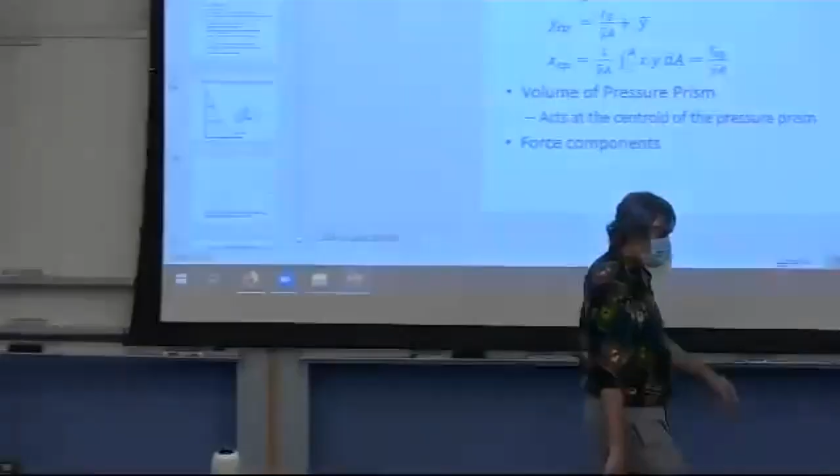Before we start today, announcements. There should have been posted the class invitation for the face-to-face lecture, I believe last week, that will carry us through November 20th.

There is an exam this Friday, covering material up through and including what we finished last week. So that's everything from fluid properties to forces on submerged surfaces. The exam rooms and who is in each room was posted today, just before class.

If anybody has an issue with the exam specifics, meaning date, time, room, they should have contacted me last Friday or earlier. But if not, you need to contact me after class if, for example, you can't make it. We need to try to arrange something.

Are there any questions from when we last met? Yes, the exam's still at 2, right? The exam is at 2 to 4 p.m. and it's face-to-face in one of the working rooms, I believe.

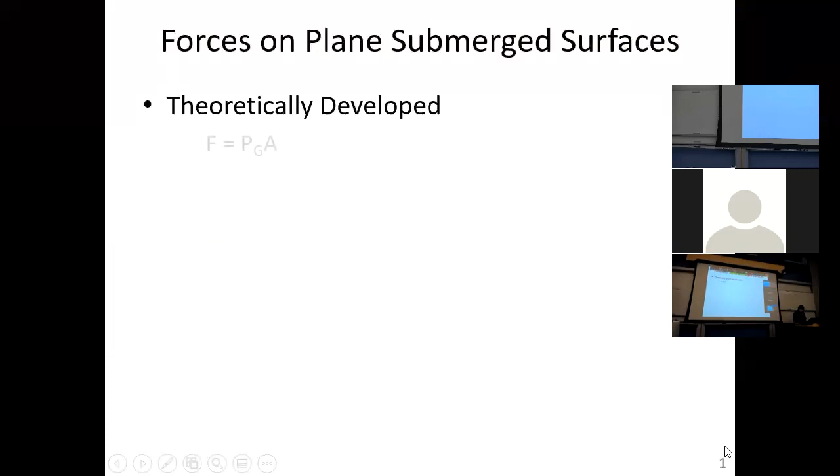So, with that magnitude, since the force is a vector, we need to know where it acts. For a plane surface, what we really need is an x, y coordinate. The y coordinate is, of course, along an inclined axis, and the y distance from the free surface to the center of area, to the center of pressure, is the location along that y-axis from the free surface to where the force will act.

What we found is, again, if we have some inclined surface, the y-axis increases from a free surface, and we made the derivation from a free surface. That's why it's important to know where it is. Earlier, I had done an example where we had an enclosed container which did not have a free surface, but we could then calculate where the free surface should be.

Do you have to know where the free surface is to get the magnitude of the force? No. All you need to know is the pressure at the center of area, and you know the pressure varies linearly across the surface. But for the location of that force, that's where you need to know where the free surface is.

So what we developed was, if G is the center of area, we were calling CP the center of pressure, measuring that from the free surface, YCP. That's equal to the moment of inertia about the centroid of the area, IG, divided by the distance from the free surface down to the center of area, y bar times A, plus y bar.

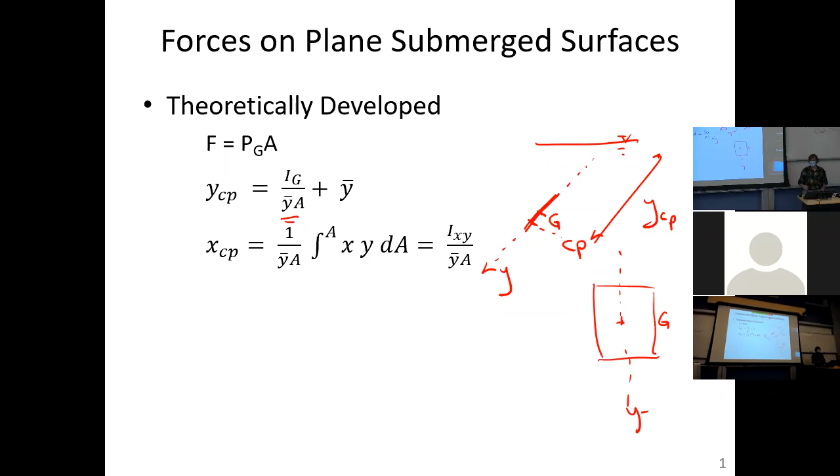Without any axis of symmetry, the other way to look at the force is that the force is equal to what I termed for you the volume of the pressure prism. So when you take this term, pressure at the center of area times area, basically what you're doing is calculating the volume of the pressure distribution, or what we call the pressure prism over the surface.

Is that an easier way to calculate than PGA? I don't think so, but again, it's another way of thinking about it, and you'll get the same answer.

And again, the resultant force acts at YCP, XCP. If you're looking at it as the pressure prism, that resultant force acts through the centroid of the pressure prism, just like weight - when we look at it in the vertical direction, the weight for any object acts through the center of mass. So it's a similar type of concept.

And then the last thing we talked about was how we could take this resultant force F. So for example, this resultant force F, we could break it into horizontal Fx and vertical components.

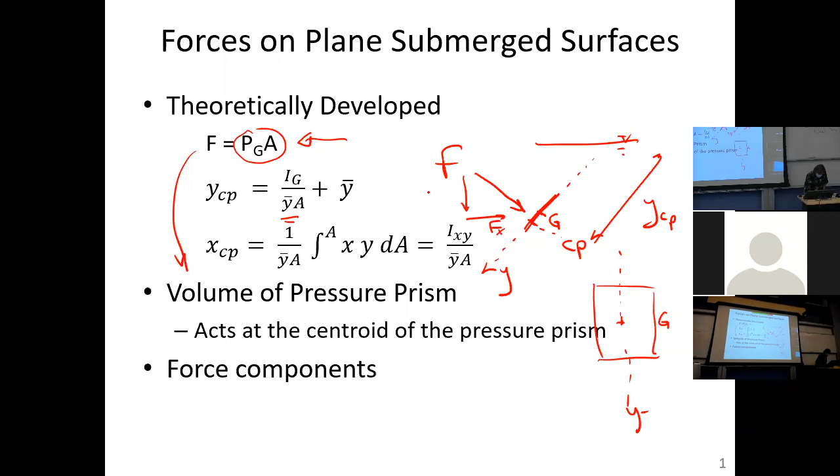And when we looked at it as far as components, on the next slide, the resultant force, if you're breaking it into components, is the vector sum of the horizontal and vertical force. The line of action would be found by a moment equilibrium.

Is that easier than calculating YCP and XCP? I don't think so, but if you think it's easier, you can certainly do it that way. You should get the same answer.

For those two components, the horizontal component, what you have to do is take that inclined surface and project it into a vertical plane. It's like taking a flashlight and flashing it on the object and looking at the shadow on the vertical wall. And that's now what you use for the inclined surface, quote unquote.

That inclination, since it's on a vertical wall, is 90 degrees. And that gives you the horizontal component of that force.

So again, under this horizontal component of the force Fx, you project the surface into a vertical plane, compute the projected surface height. The width should be the same as the natural surface that's not projected. Compute and then employ the theoretically developed equations on the projected area.

So what I mean by that, we had F is equal to PGA on the last slide, which is the generic form for any inclined surface.

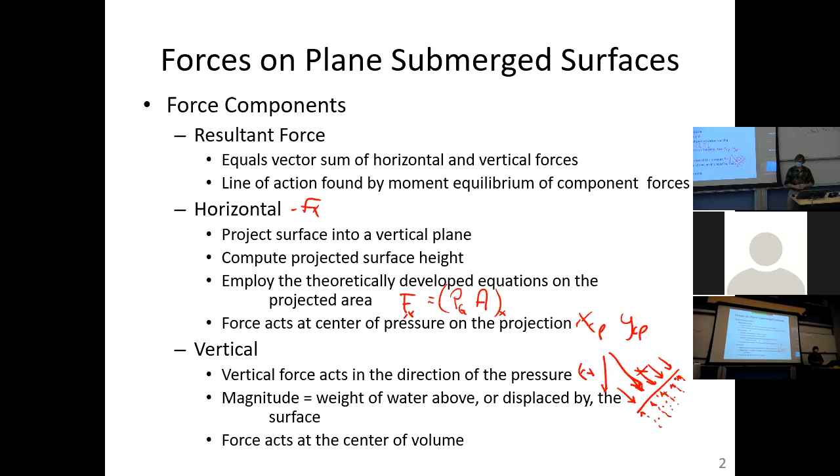So when we're looking at the vertical component, we are talking about the magnitude of the vertical component being either the weight of the water that's physically above the surface, but if the fluid's below it, it's the weight of the water displaced that would have been above the surface. And that force acts at the center of the volume.

So we did an example with that, and that's where we left our last class. So what I want to talk about today is we're going to use the same concept we just talked about, only now extend it to curved surfaces.

For example, you've seen tanker trucks with fluids moving down the highways, and the ends of those tanker trucks are curved, and very commonly the sides are curved surfaces too. So in order to specify the welds or bolts or whatever fasteners to hold that thing together, we need to know the forces occurring on that system.

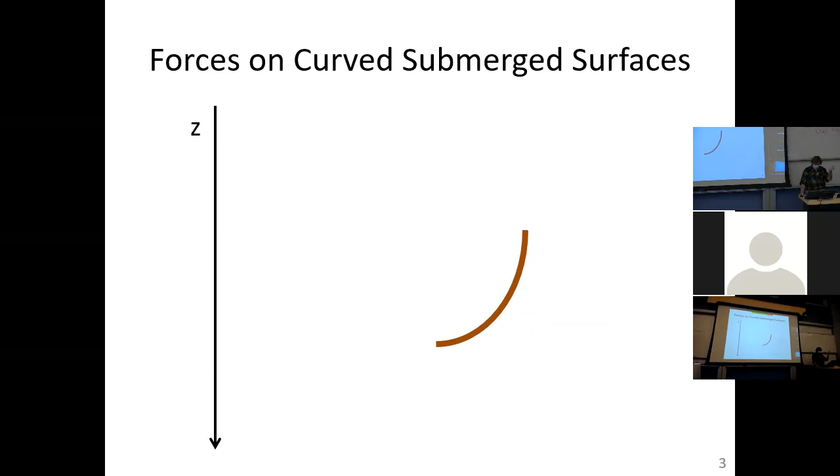So here we have a curved surface. And if we look at the vertical direction, Z was downwards, H was positive downwards, or we'll just say this is the Z direction. We know that pressure increases linearly as we go down through a fluid. So we have this curved surface now, submerged somewhere in this fluid.

We're either looking at the left side of the surface or the right side of the surface. We're always looking at these types of problems as the fluid being on one side of the surface. On the other side, there could either be no fluid, so atmospheric pressure, or it could be a completely different fluid. But the mechanics are the same — we're only calculating a force on one side.

So in the vertical, you can see that we have these pressures operating all over the surface. But again, we look at the pressure distribution as being normal to the surface. So what you have is this curved pressure distribution everywhere normal to the surface. And when we integrate that pressure distribution, we're going to get some resultant force.

Instead of going through a theoretical development like we did before for a plane submerged surface — well, we could go through a theoretical development, but you would need to know the equation of that line. So if it was a parabola or a semicircle, you could build that into the integration. But conventionally, what we do is take the components.

Likewise, for the vertical force component, again, the fluid is either above or below the surface, but the vertical force component is just going to be the weight of the fluid that is physically above the surface or displaced by the surface. So if we look at a semi-theoretical development, if we look at dA, dA is so small that it's basically a little plane surface.

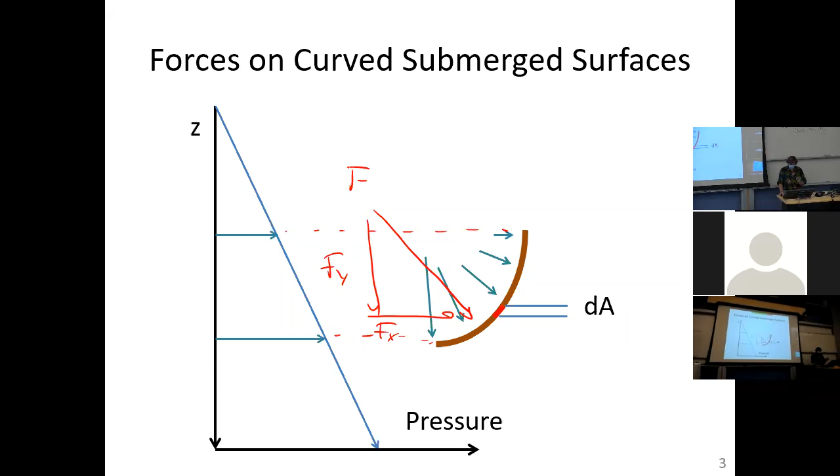So here's our dA — it's incrementally small. And on each little incremental surface dA, we have an incremental dFx and dFv. All we're saying is at the differential scale, we can certainly take this surface, break it up into components that are basically plane submerged objects, and use everything we talked about before.

Ultimately, when we integrate over the entire surface, all we're doing is integrating or summing the horizontal forces on this curved surface, or the vertical forces. So as I stated before, the horizontal force is the force acting on the projection into the vertical plane, and the vertical force is just the weight of the fluid above or displaced by the surface.

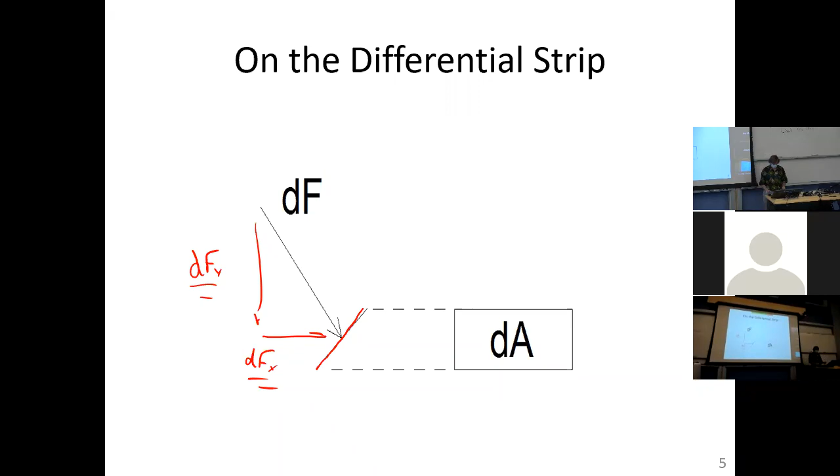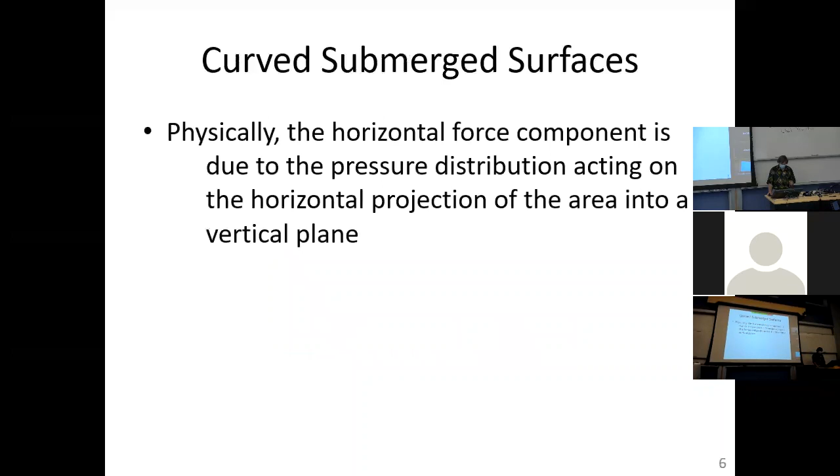So I'm going to do an example. I just wanted to kind of get into this. I think I've talked about all this.

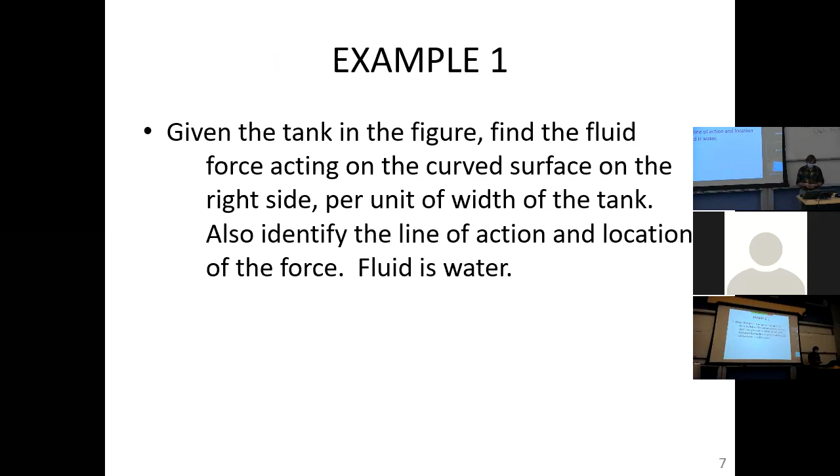Here's a tank, and you'll see it on the next figure. What we want to do is calculate the force on the end of the tank, which is going to be a curved surface. The fluid is water, and we also want to identify the line of action and location of this force.

So this is what our tank looks like, and that red area is a portion of the tank where we want to calculate the force. What's the force on the end of this tank? The end of the tank is a quarter circle with a radius of 6 feet, as you can see. You can also see in this problem that we have a submergence of this curved surface.

So we see a free surface. Remember, the fluid in here is water. Since all these dimensions are in feet, we're going to work the problem in the foot-pound-second system of units. Again, when you're doing the exam or homeworks, take the cue from the way the problem is given to you. If the problem's given to you in metric, do the problem in metric. If it's given to you in BGS, do the problem in BGS.

So if we know that we have 3 feet of submergence to the very top of this, if we take this curved surface and project it onto a wall, it's going to appear as a vertical plane.

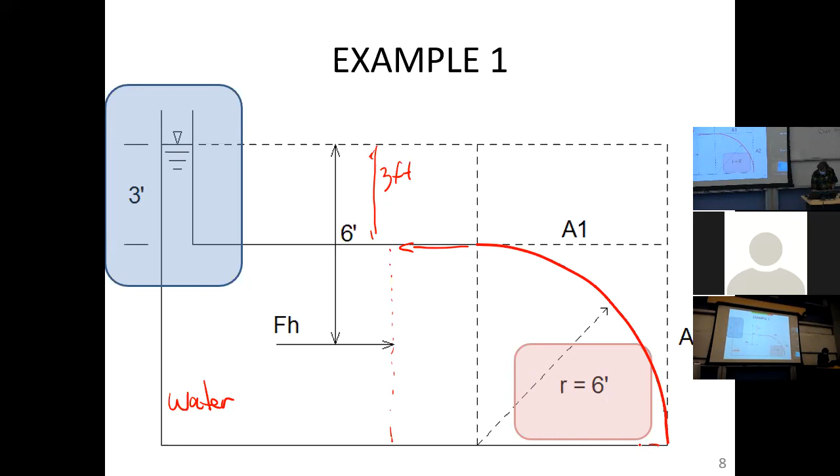Now, I haven't given you the width of this tank. Let's just say it's 1 foot wide. We're doing this problem per unit of width. So if it's 1 foot wide, when you project this curved surface into a vertical plane, what you get is a surface that's 6 feet high by 1 foot wide. It's a rectangle. That's the projection of the curved surface.

And I think for the rectangle, we all know that the center of area is halfway down from the top. So if it's 6 feet high, it's 3 feet down from the top. And if it's 1 foot wide, it's half a foot over from each side.

And since we know where the center of area is, if it's 6 feet high, from the top of the tank to the center of area is half of that 6 feet, or 3 feet. And since you have 3 feet of submergence, the depth of submergence to the center of area is the 3 feet plus the 3 feet, or 6 feet.

Once we know the depth of submergence to the center of area, we can calculate the pressure at the center of area. With the pressure at the center of area of the projection, we can get the force on this horizontal projection, and that's the horizontal force.

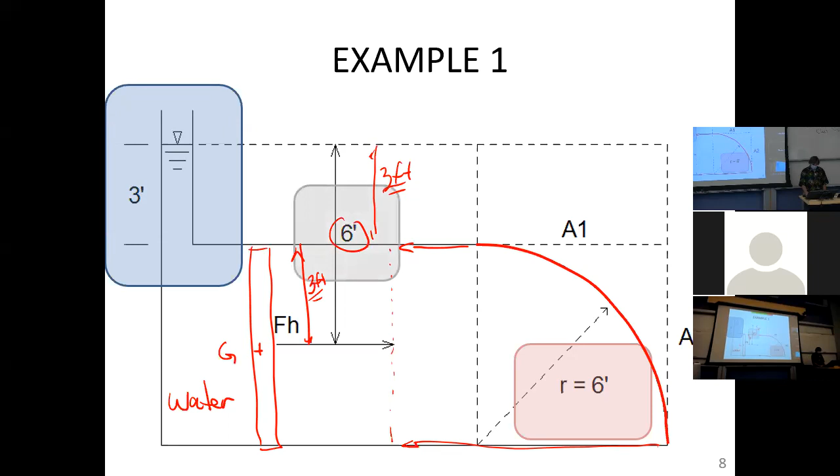Continuing: the horizontal force is going to be the pressure at the center of area of the projected surface into the vertical, that's the 6 foot by 1 foot rectangle, times the area of that 6 foot by 1 foot rectangle. So it's the pressure times the area of the horizontal projection.

So there's our curved surface, and as I drew on the last one, we're going to project it into a vertical plane. Looking from the edge, before all we saw was a quadrant of a circle. When we project it, it just looks like a vertical line, but if we look at it from the side, we will see this rectangle that's 6 feet high by 1 foot wide. Knowing where the center of area is, we're calculating the horizontal force on that projection.

So the pressure at the center of area is the depth of submergence of the center of area, which we identified in the last slide to be 6 feet, times the specific weight of water. So gamma H is the pressure at the center of area. And then we multiply it by the area, 6 feet high by 1 foot in depth. Again, it's a force per unit width, if you will. And that gives us 2,246 pounds.

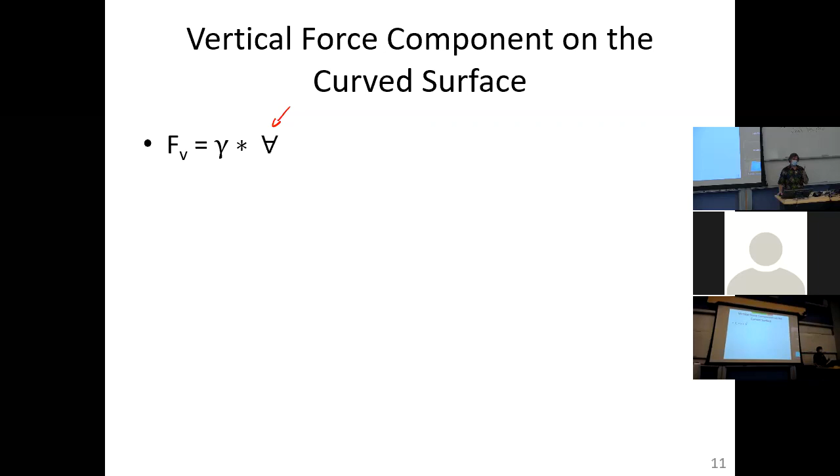So, same problem. The vertical component, we've already solved the horizontal component. The vertical component is the specific weight of the fluid times that weird looking V with the line through it, which is the volume displaced. For volumes, I usually put a V with a line through it because we have a lot of V's in this course, for example, velocity, as you will see. So again, specific weight of water, 62.4 pound per cubic foot.

Upwards. So again, that line of action of FV is vertically upwards since it represents the fluid displaced by the surface. Again, think of the pressure distribution everywhere is pushing up on the surface. And the vertical component of that pressure distribution is upwards.

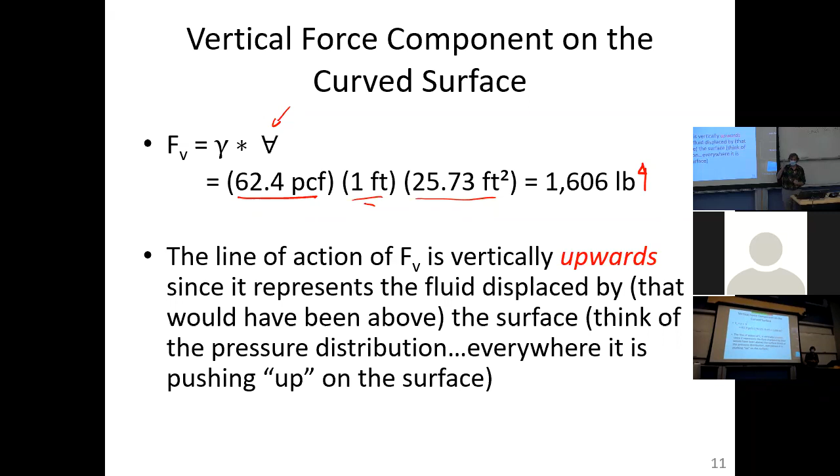So the magnitude of the resultant force, you now have the horizontal component and the vertical component. This is your old friend, the Pythagorean theorem. The total force magnitude is the sum of the squares of the two components, square root.

When we multiply that out, the horizontal component, or Fx as I was calling it before, 2,246 pounds squared plus 1,606 pounds squared, square root, gives us a resultant force of 2,761 pounds. So remember, we have Fh, or Fx, of 2246, and Fv of 1606 pounds. And the resultant force is this 2761.

And this looks like a right triangle. That means we can either calculate alpha or theta to identify the exact line of action and the exact point on the surface where this force acts. Typically we need to know the line of action and where a force acts when we're doing a moment equilibrium. We had gone over that with forces on plane submerged surfaces. So fundamentally, because everywhere the pressure distribution is normal to the surface, this resultant force is normal to the surface.

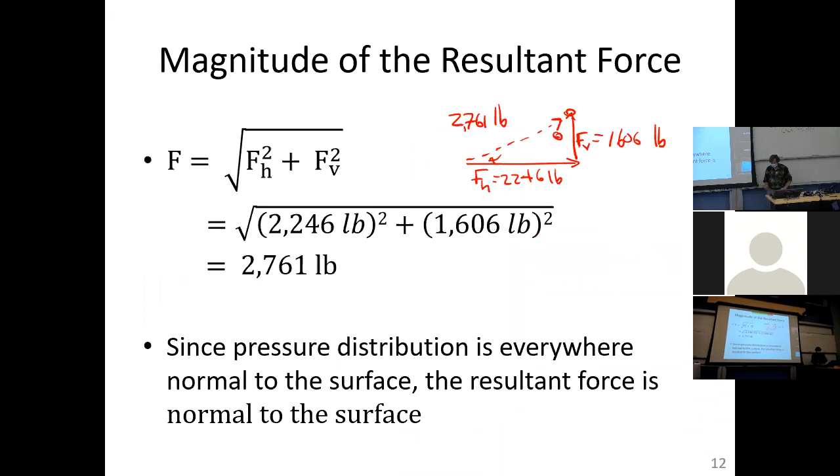Question? Someone wants you to clarify how you know the direction of FH and FV. Excellent question. In case you don't know, how do you know the directions of FH and FV? What I'm going to do is...

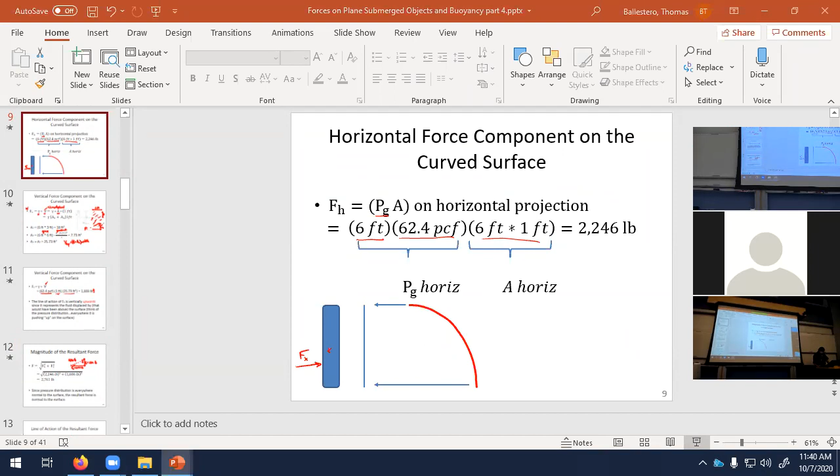Let's start here. So this was our surface. And for the horizontal force, what we did was project into a vertical plane. Remember, the pressure distribution is everywhere normal to the surface. So we have this curved pressure distribution, and the resultant force again has to be normal to the surface.

Since for the horizontal force, Fx or Fh as I called it later, you have a vertical surface, the horizontal component is the horizontal component to the resultant vector F. That resultant vector F that we just calculated is normal to the surface, pointing at the surface, because the pressure distribution points at the surface. Therefore, it must have horizontal and vertical components in these directions because of how the resultant force is pointed.

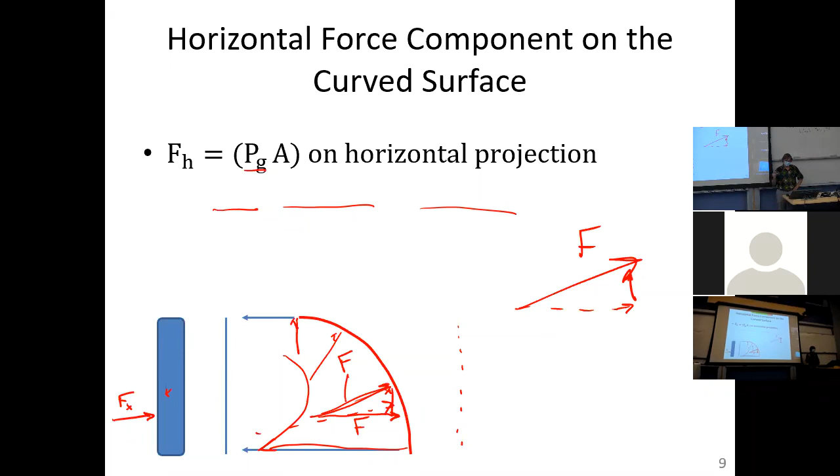Okay, and if there's more on that, just let me know. Thank you. Okay, that's where we were.

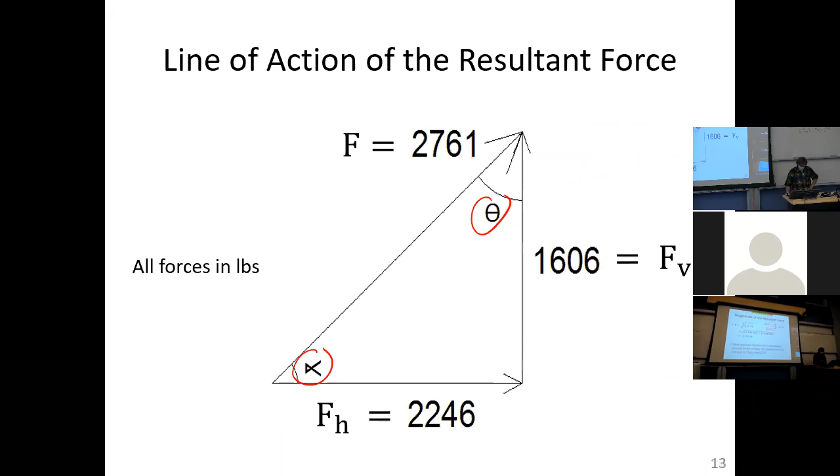So again, knowing all three sides of a right triangle, what we can do is, for example, for that horizontal, the angle of that resultant force off of the horizontal, tangent of alpha is the vertical force, the 1606 pounds divided by the horizontal force, or when we resolve this, alpha is arctan of FV over FH, which gives us alpha equal to 35.6 degrees.

If you don't like doing it that way, we can solve for theta. For example, the tangent of theta would be the horizontal over the vertical, the way we define theta. And you would find theta to be 54.4 degrees. As you know, the sum of the angles in a triangle should sum to 180 degrees. Since it's a right triangle, one of those angles is 90 degrees, which means the sum of the other two should be 90 degrees. 35.6 and 54.4 is 90 degrees. Nice simple check.

So again, we just solved theta and we just solved alpha. What we want to know is exactly where on this surface this force is acting. Again, if we have to do a moment equilibrium, we need to know not only the line of action, but maybe the distance to a point about which we are taking moments.

So again, this is our triangle, and we have this resultant vector F, and it's got components in the horizontal direction. Again, I was calling it Fx originally, and I switched over to Fh and Fv. And we have similar triangles in that we have a hypotenuse of 6 feet. What we're looking for is what's the distance on that same triangle. So again, you have a force triangle, and then you have a dimensional triangle, and they're the same triangle.

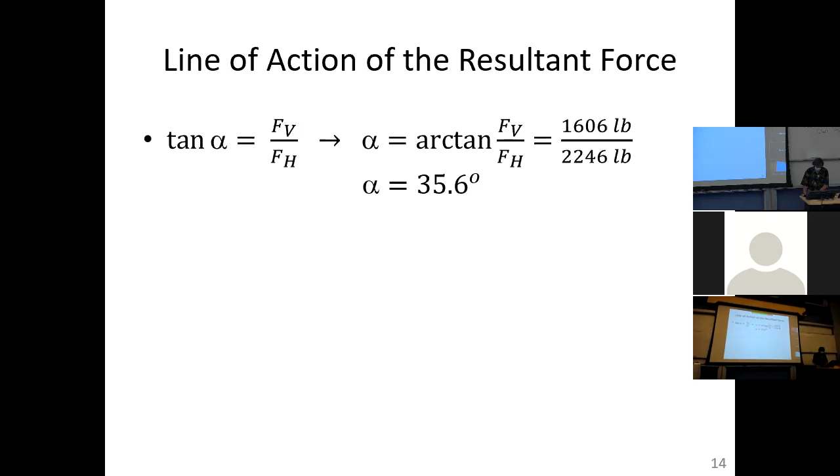So again, the force triangle is 1606, and this was - I'll just go back - get a break - 2246. And 2760.

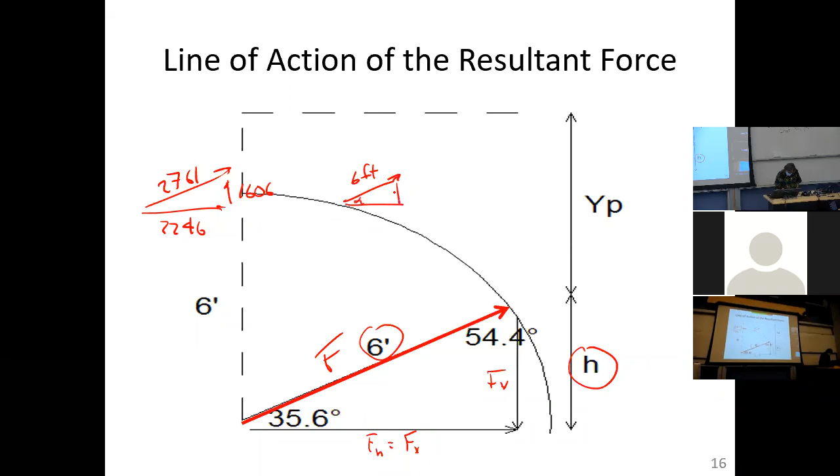And those are all in pounds. By analogy, we have this triangle with 6 feet and angles alpha and theta, and we're trying to find this distance h by similar triangles. If we know what h is, then we know YCP, the distance to the center of pressure from the free surface down to that same point. That's why we're going after h.

We did not develop an equation for YCP for a curved surface. The only equations we have for YCP are for plane submerged surfaces. So one way around this is to look at the force triangle, and you can do this with any curved surface. Once you get the force triangle, the horizontal, vertical, and resultant force, you can calculate distances from the analogous dimensional triangle, meaning trying to find the exact location, horizontal and vertical.

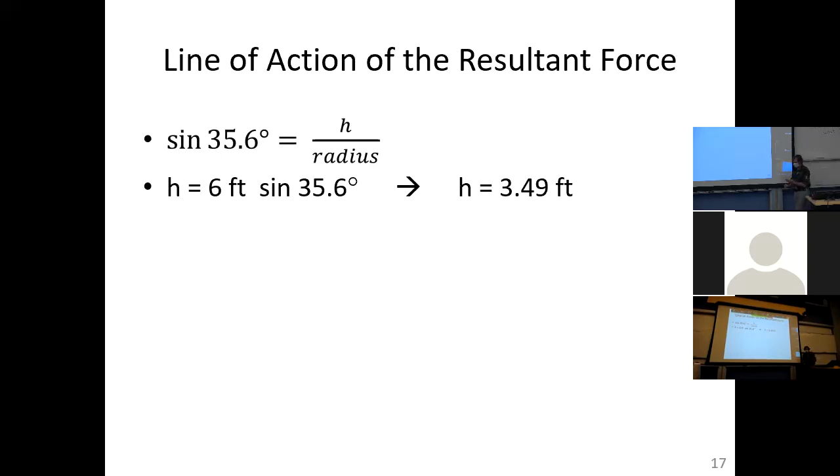So we know the sine of 35.6 degrees, going back to the previous one. The sine of this angle is opposite h over the hypotenuse, 6 feet. So that's what we have here, and we want to solve that for h. So h is 6 foot sine 35.6 degrees, that's 3.49 feet. So we know the line of action of that vector.

It is perpendicular to this curved surface. The curved surface is a quadrant of a circle. If the line of action is perpendicular to the curved surface, it goes through the center of curvature, the center of the circle. So on all of these previous figures, that force goes through the center of the circle. It has to, because it's normal to the surface, since this is a quadrant of a circle. If it's an ellipse, this is not true.

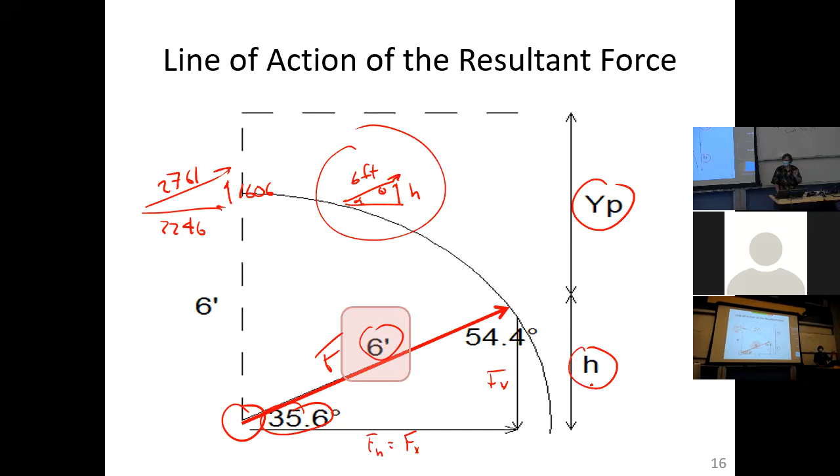If you wanted the depth to the center of pressure, we know the total depth from the free surface to the very bottom of the system is 3 feet plus 6 feet, that's 9 feet. H is the dimension from the bottom all the way up to the center of pressure. So if we subtract the 9 feet of total submergence and subtract off what we just calculated as the vertical distance to where this force acts, we get YCP equal to 5.51 feet.

So again, if our tank looks like this, this distance is 9 feet. We just calculated h, and that was 3.49 feet. So what we're calculating is YCP, the vertical distance down. You can figure out exactly where this is, and if you have to do a moment equilibrium, now you can figure out the distance to whatever point about which you want to take moments.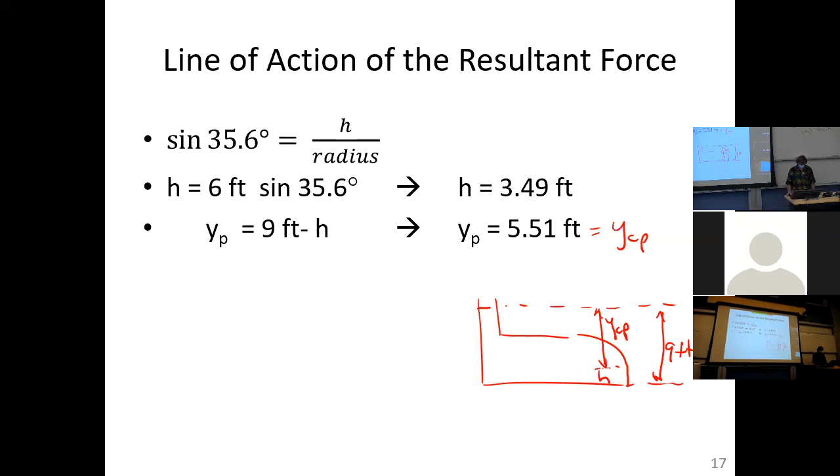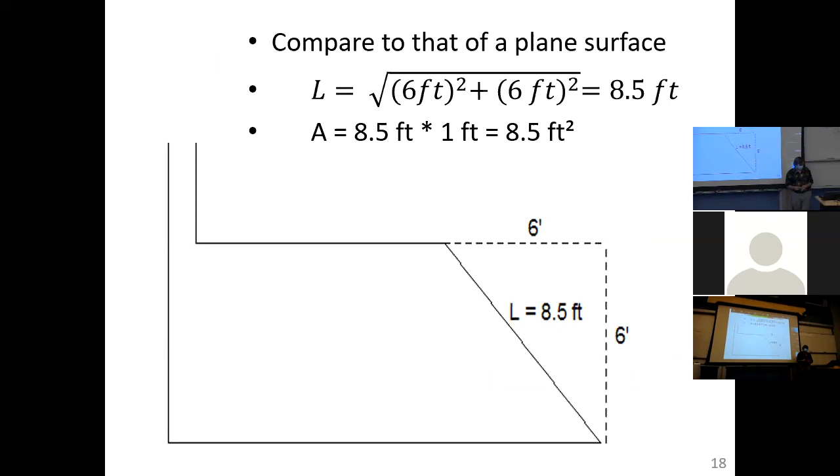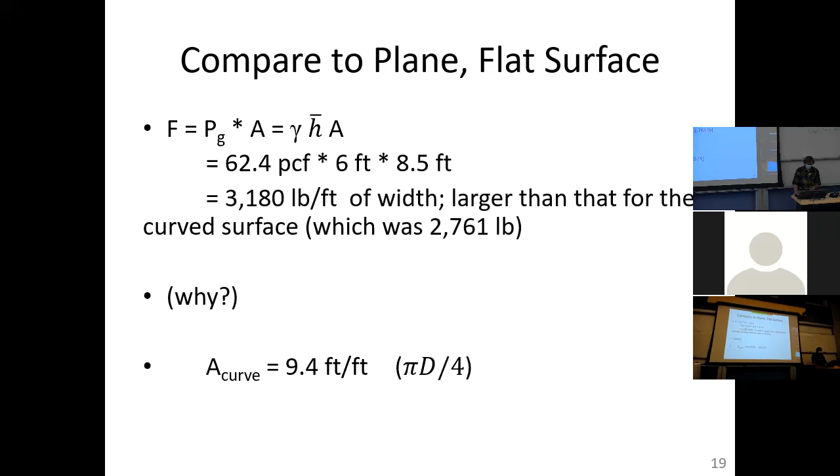So if we compared this to a plane surface, you might say, forget this, I don't want to deal with a semicircle, I'll just look at this as the flat end of a tank. I don't want to run through all these numbers, I posted these so you could look through them. But basically what would happen is you'd get a larger force. The reason is when you go with the plane surface, you're neglecting all that volume displaced, so you end up with a much different vertical component. The horizontal component would be the same.

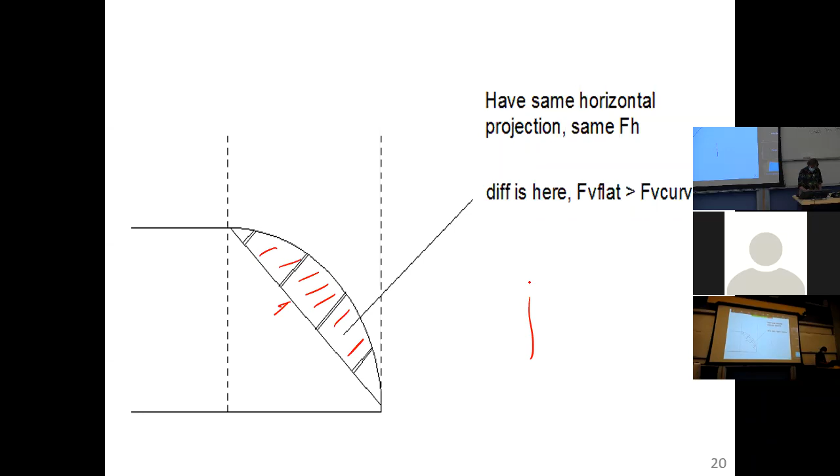So again, it's dangerous to make simplifications like this. It's not too challenging to calculate the vertical and horizontal components on regular geometric objects. When it gets complex, I don't know why you'd be doing something complex, but if it did, just break it into composites like we talked about before. Last week we talked about, for example, a figure that looked like this, and what we did was break it into two pieces. You can do the same thing with any curved submerged surface, break it into pieces that are manageable.

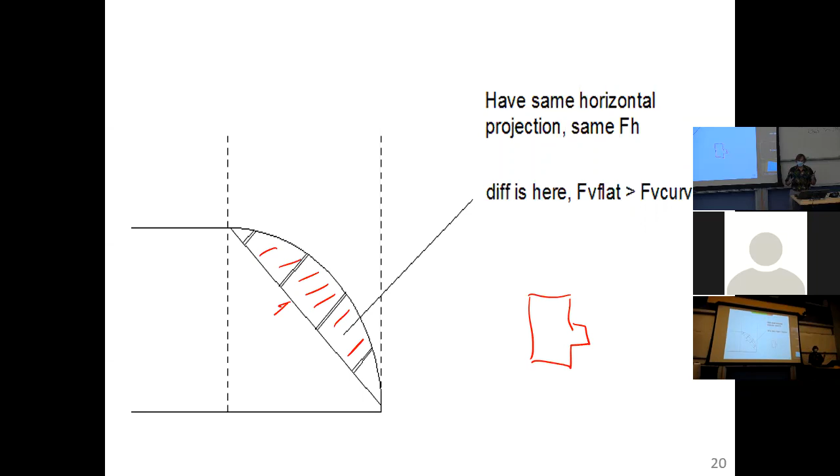Okay, so in the last 10 minutes, I want to introduce buoyancy and flotation. So what we've been covering is forces on plane submerged objects, two-dimensional objects. Now we're talking about three-dimensional objects. And when we talk about three-dimensional objects, there are forces associated with them, but now we have to consider that third dimension.

So for conceptually understanding this, I'm going to take a floatable brick. This floatable brick is lighter than water, so here's a little brick. That little brick is lighter than water, and so what you see is it's floating. It's only submerged some distance, which I'm calling h. Sometimes that's also called the draft. So this brick happens to have dimensions dx by dy by dz, so it's easy to calculate the volume.

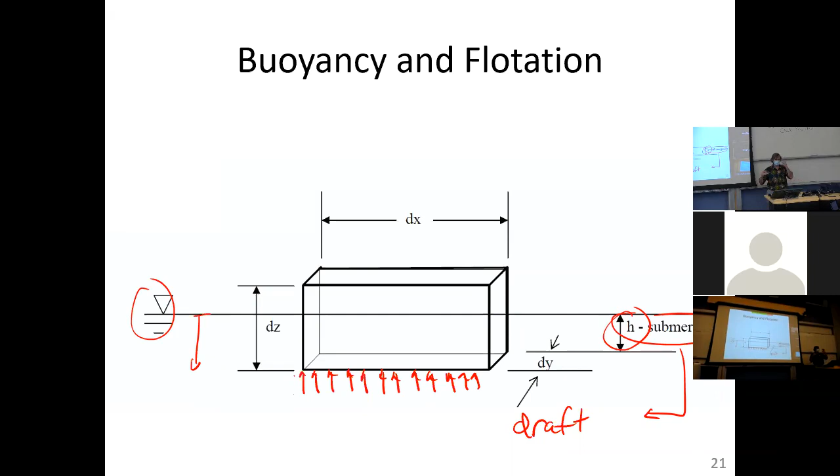What we know is, since it's a nice simple shape, a nice simple brick, and it's of uniform material, it's going to be floating horizontally. If it wasn't uniform material, it could certainly not be horizontal. But just to develop this, we're going to say the bottom's horizontal, which means you know the pressure at the bottom. If you have a depth of submergence from the free surface of h, then the pressure at the bottom should be just the specific weight of the fluid times h, and it's constant all over the bottom. So we have this differential sized brick, dx by dy by dz.

It's under a submergence h, and the pressure at the bottom is gamma h. From that, we can calculate the force at the bottom.

Now, force is equal to the pressure at the center of area times area, right? But the pressure all over the bottom is the same. It's not only the pressure at the center of area, the pressure at the bottom everywhere over the bottom is the same. So we're not violating what we developed before. This is just a very unique situation where all of the pressure distribution happens to be the same.

So the pressure at the bottom times the area of the bottom would be a force, and that force is pushing upwards because the pressure distribution everywhere is normal to the surface, pointed upwards.

And since we know that the force at the bottom is the pressure at the bottom times the area, we can substitute gamma h for the pressure. Then the force on the bottom is gamma h A, the specific weight of the fluid, whatever it is, times the depth of submergence, times the area of the bottom, which would be dy by dx.

If you look at those second two terms, h times the area is this volume. When we were just talking about curved surfaces, we called that the volume displaced by the surface, right? And this is no different. This is the volume displaced. Instead of a surface, it's a volume, but it's the fluid volume displaced, or the displaced fluid volume.

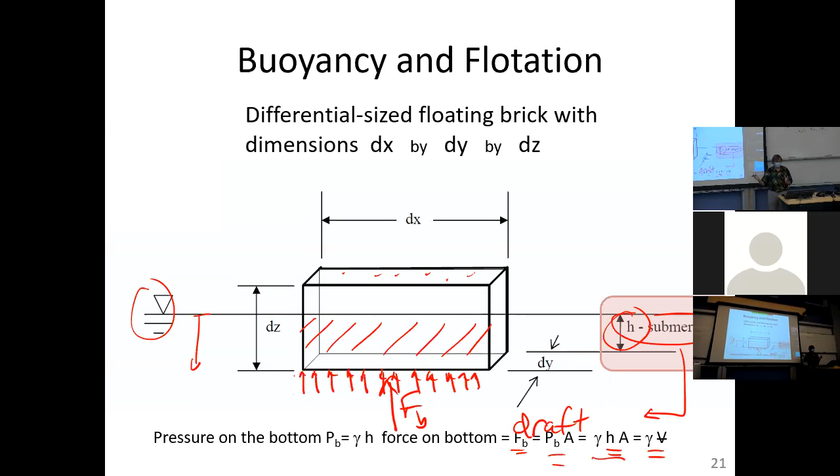Okay, so in the vertical direction, the floating object is in equilibrium. It's just sitting there minding its own business. And what that means is, if we performed a free body diagram and we looked at a force equilibrium in any direction, the sum of the forces are zero. But in this case, we're specifically looking at the vertical direction, and typically upwards is our positive z direction. So the sum of the forces in the vertical must be zero for this floating object.

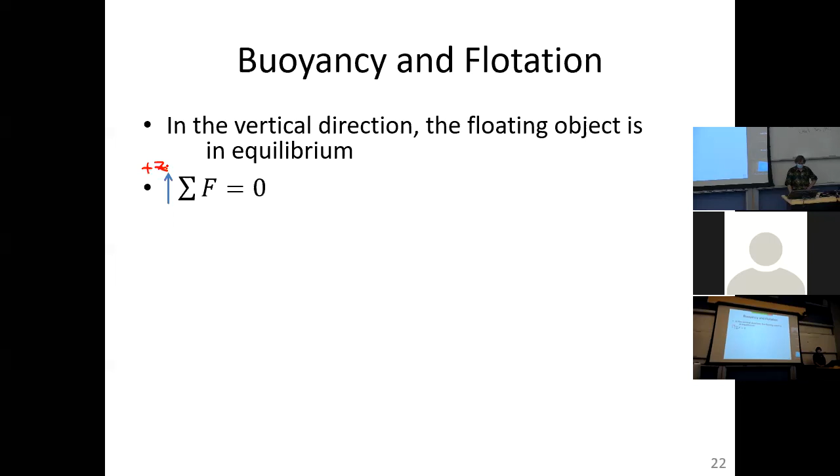The upwards force is due to the pressure distribution at the bottom, and we call that the buoyant force. In this case, if we look at a free body diagram, here is our brick. It's got a weight, and it's got the buoyant force operating on it. Those are the only two forces in the vertical direction, because this is sitting there, it's not moving. And so in this case, if z is positive upwards, this would equal the buoyant force minus the weight, or the weight is equal to the buoyant force.

An object displaces an amount of fluid equal to its own weight, Archimedes' principle.

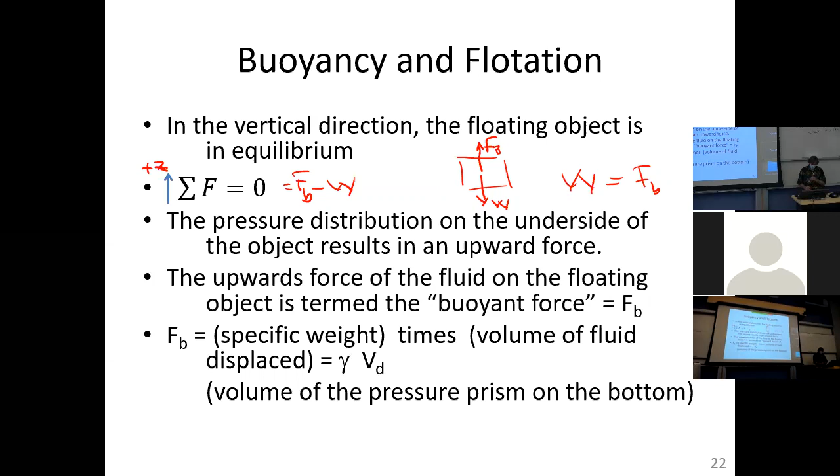So we can calculate the buoyant force, and the weight we can always calculate. The weight is either given to you in problems, or if you know the volume and you know the specific weight of the material, wood, concrete, steel, the weight is going to be the specific weight of the material times the volume of the object. And we've calculated that before here.

So again, the buoyant force acts on any submerged or partially submerged object, and we'll talk about both. The buoyant force basically represents the difference in the pressure distribution from the top of the object to the bottom, whether it's submerged or unsubmerged.

So again, if you have a submerged object, there's our free surface. We've got a pressure distribution on the top, and we've got a pressure distribution on the bottom. And because pressure increases with depth, the pressure on the bottom is always going to be at least equal, but usually greater than the pressure at the top.

When the two are almost the same is when the object height becomes smaller and smaller, infinitesimally small. But in general, when we have height to a physical object, you're going to have a greater pressure on the bottom than the top. And the buoyant force is basically that difference in pressure distribution integrated over the entire surface of the object.

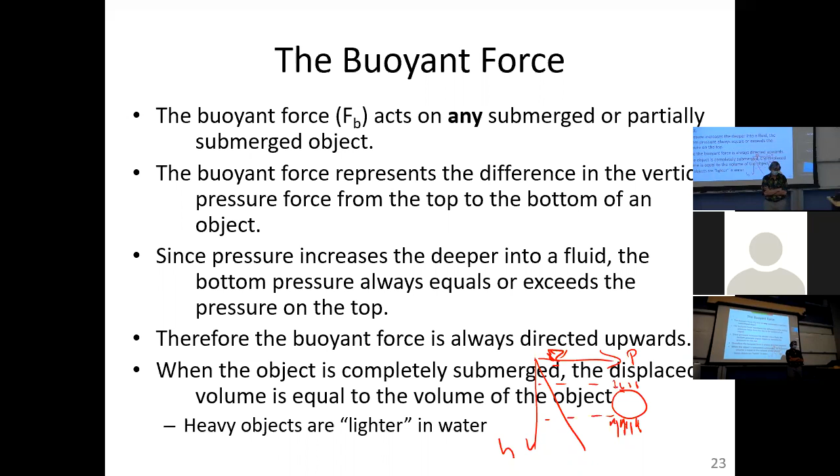The exam is going to be incredibly similar to homework problems, so there's not going to be any derivation. Typically in this course I've gone over theory, broken it down to practical application, and then you see these different types of problems that ask for one of the components of an equation we developed. Your most challenging issue is being able to distinguish between the different facets of the course we've talked about. For example, we talked about fluid properties, like compressibility versus forces on submerged objects. So if you see something asking for a force, it could be a fluid property problem, for example when we talked about shear or compressibility, versus forces on plane submerged objects.

So the first thing you want to do is distinguish: is this a fluid properties problem, or is it a fluid statics problem? For example, if you see a manometer, you should know that's a fluid statics problem. You should recognize it, so you shouldn't go try to figure out the specific volume of the fluid just because I gave you the density. That's not going to help you at all, although it is a calculation.

So that's the next thing. If you have performed all of the homeworks, which we grade, of course you've done that, but also the ones in the book, you'll be fairly well prepared if you can do them by yourself. The one thing this COVID situation has done is probably made you study more on your own than in groups like in the past. I think this material, the only way to really learn it is to do it repetitively, and that's what the homeworks are trying to build for you.

I would say look at the economics of an exam. This is probably the most important, valuable information I can give you. Look at a problem; if you know how to do it, do it. If there's any question in your mind, skip it and go to the next one. We give partial credit—sometimes the TAs give more partial credit than I care for, but I don't look over their shoulders when they're grading. At the end of the exam, go back to the problems you skipped and try to attack them. Leaving a blank problem is easy for us to grade, but gets you no partial credit.

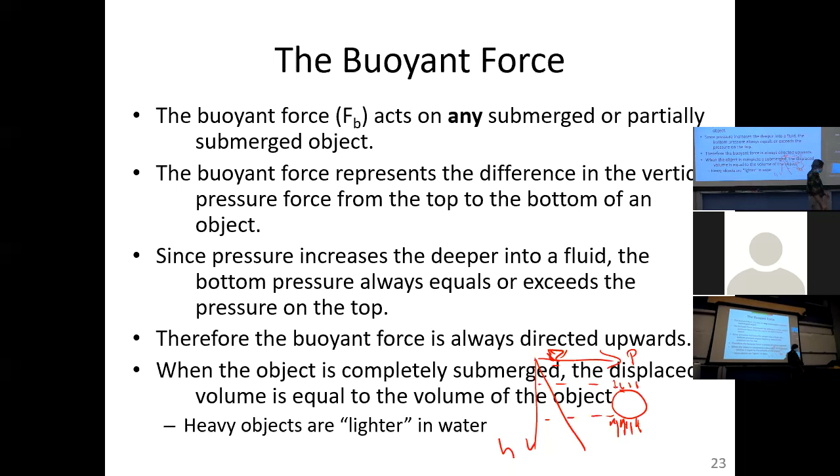There must be more questions. I think I set these Zooms to end at 12:10, so I've got a few more minutes. Someone's asking if there will be any multiple choice questions. No multiple choice.

People were asking about a review session this week. I assume there's not one, but I want to double check. There will not be a review session just because I haven't had time to set it up. If I can set one up, it would be tomorrow night, but it will be challenging for me to do that. If I do set it up, it will be a Zoom, probably late afternoon to evening.